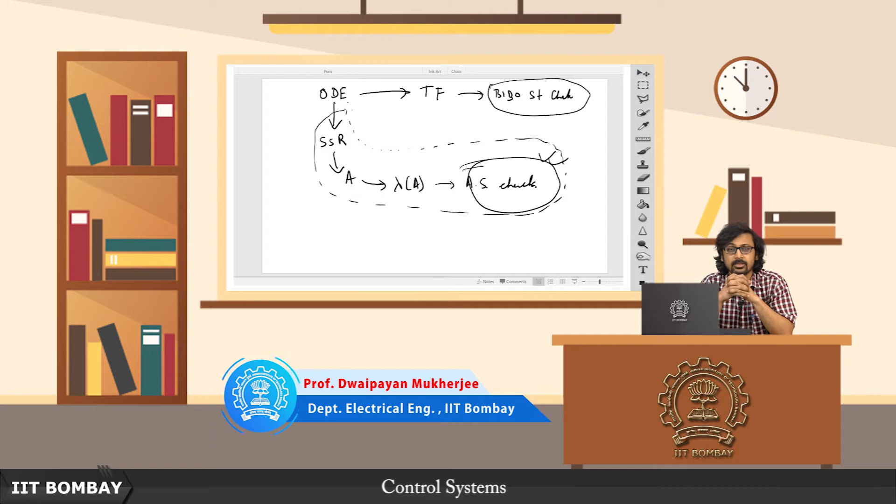Welcome back to another lecture on control systems. In the previous lecture, let me just quickly recap what we did. We actually saw this notion of asymptotic stability and compared it with the notion of BIBO stability, the erstwhile BIBO stability we had learnt during our foray into transfer functions.

When we are dealing with classical control based techniques, we were already aware of something called BIBO stable, bounded input bounded output stability. And we saw that this notion of asymptotic stability is a wider or broader concept that already incorporates within itself the notion of BIBO stability. So hereafter it makes sense to just talk about asymptotic stability, because that will automatically imply that it's BIBO stable, at least insofar as we are dealing with linear time invariant systems.

The asymptotic stability seems to be the most powerful notion of stability as a matter of fact. So with that in mind, we actually saw this figure that we drew in the last lecture, where given an ODE, given a system represented as a constant coefficient linear ordinary differential equation, you can go via this transfer function route and you'll only get as far as checking the BIBO stability.

So that's why it's the external description, the notion of external stability. On the other hand, if you start from this ODE and go via this state space realization route, go to this state space realization, pick out the A matrix, find out the eigenvalues of this A matrix and check whether they are all on the left half plane, and you assure yourself whether it's asymptotically stable or not.

And you find that if you can make it asymptotically stable, or if it is asymptotically stable, then it's guaranteed to be BIBO stable. So therefore this is an internal description of stability, internally stable.

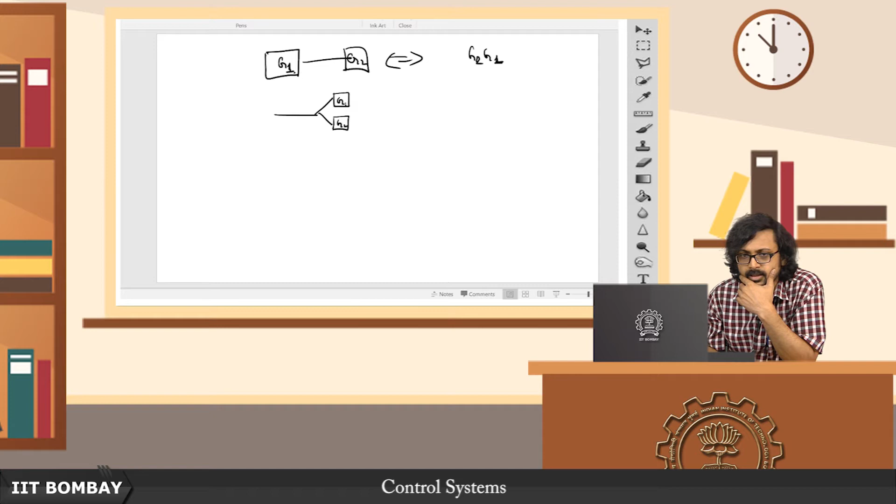We have seen earlier that when you are given this G1 and G2 in series, that's equivalent to G2, G1, if you are a stickler. Similarly, when you have G1 and G2 in a parallel path like this, then this is just the same as G1 plus G2. So then this is the same as having this block, G1 G2, as your input output.

Similarly, when we had this G1 sitting here and G2 sitting in the feedback like this, assuming negative feedback, then we saw that this is tantamount to saying G1 divided by 1 plus G1 G2, the whole thing.

So we have seen these block diagram reductions, but these are all in the transfer function domain. Now we have come a long way from the transfer function domain, and we are claiming that the state space method is a better way of representing systems for the simple reason that it gives us internal descriptions.

So now we wonder, like in the last lecture I discussed this point, that okay, maybe there are no pole zero cancellations within block G1 and within block G2, but when you combine them together, it might be that there are pole zero cancellations. So clearly you see there might be a flaw.

What is that flaw? If you are given a transfer function like this, G1 and G2, in this configuration or in this configuration or in whichever configuration you like, what you do is first reduce it, in the transfer function domain, to this. So we are still in the transfer function domain here.

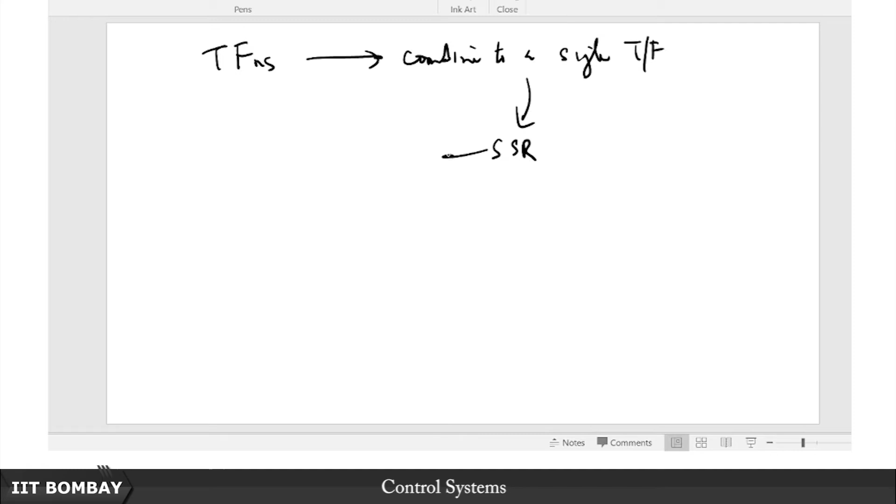So even though you might think, okay, I have these transfer functions, I combine them together, I got the overall transfer function, and then I go to the state space method. So here is the sequence of steps: given multiple transfer functions, I combine them to a single transfer function, then I go for this state space realization, and then I go for this lambda A check.

So what I have is multiple transfer functions, which I combine into a single transfer function. This I do in the classical domain, the Laplace transform domain. From this Laplace domain I get a state space realization, and then I check the lambdas. I look at the lambdas and find they are all on the left half plane.

So then I infer that the overall system is asymptotically stable. This combination of multiple transfer functions means there are multiple systems, interconnected systems. So you had interconnected systems, you got their transfer functions. Each system has an ODE, you get its transfer function, combine the transfer functions, all within the Laplace domain, and then move to the state space domain.

And then you do this lambda check. You will clearly see the flaw in this method. The flaw is that while combining these transfer functions into a single transfer function, it might be that each individual block does not have pole-zero cancellation, but there might be pole-zero cancellation between the different blocks.

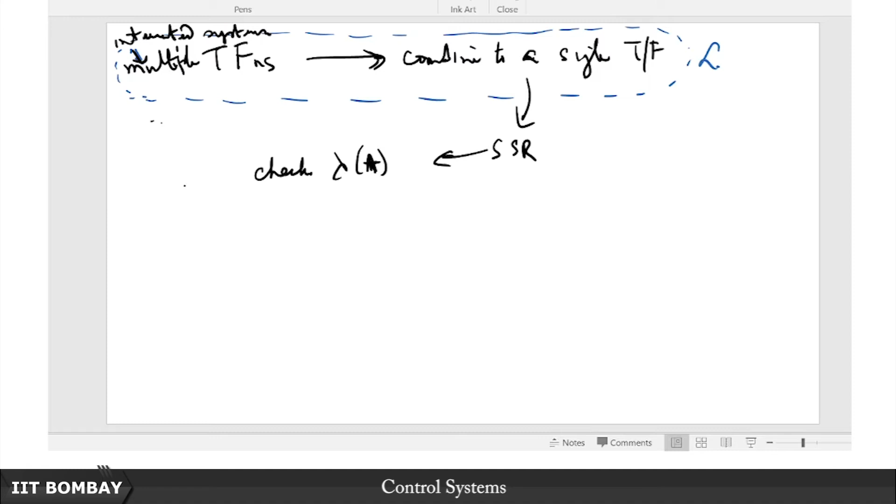So for instance, G1 and G2 might have a common pole and zero, G2 might have a pole where G1 has a zero. They might combine in a certain way such that all the poles of G1 and G2, if you sum them together, for example, take 1 by S plus A, plus 1 by S plus B.

Let me call this alpha, let me call this beta. So you get alpha S plus alpha B plus beta S plus beta A, upon S plus A into S plus B. This is the parallel realization I am talking about. Now suppose alpha plus beta is equal to 1, and alpha B plus beta A is equal to A.

Suppose this condition holds, then what will happen? This will lead to basically a transfer function that looks like 1 by S plus B. So the pole that was present in the first transfer function would have already vanished in this realization.

Similarly here also you can see that pole-zeros might vanish, there might be some cancellation between G1 and G2. Not all poles of G1 and not all poles of G2 will make their appearance in the overall transfer function. That is why this method is flawed. You might check the lambda A's and feel like, if they are all in the open left half plane, then this overall combination of systems is asymptotically stable.

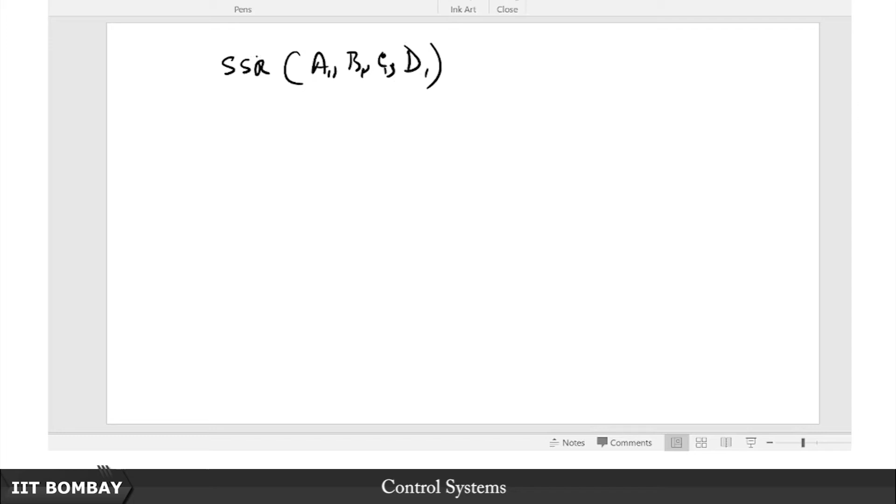Suppose I have A1, B1, C1, D1 for system 1, which is in cascade with state space realization of the second system A2, B2, C2, D2. We are trying to avoid getting from this state space to G1. You might think, let me go from this state space realization to G1, from this to G2, and then multiply them together. But that isn't going to work, that is a flawed method. We have seen that in multiplying we might actually cancel out some poles and zeros of each of those systems among themselves. So we now need to figure out a way of merging these together, and it turns out a little bit of algebra, very small algebraic manipulations, will allow us to do this.

It is not really very difficult to see how this happens. So let us take an example. I will basically solve it for 3 cases. Those are the 3 basic cases, and any other block diagram is going to be a combination of those 3 basic cases. So the 3 basic cases, example 1 is this, basically the same thing as I did earlier.

So you have this first system: x1 dot equals A1 x1 plus B1 u, and y1 equals C1 x1 plus D1 u. So this is my u. But what is the output here? The output here is y1, and this is the crucial bit.

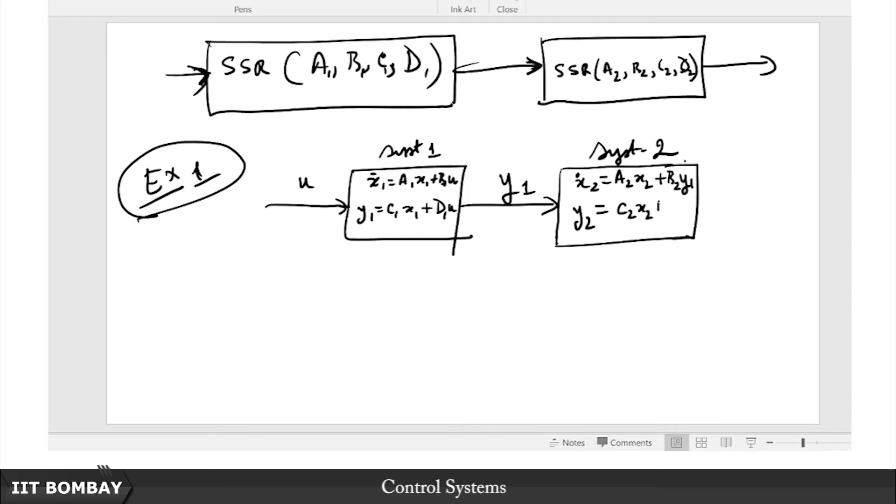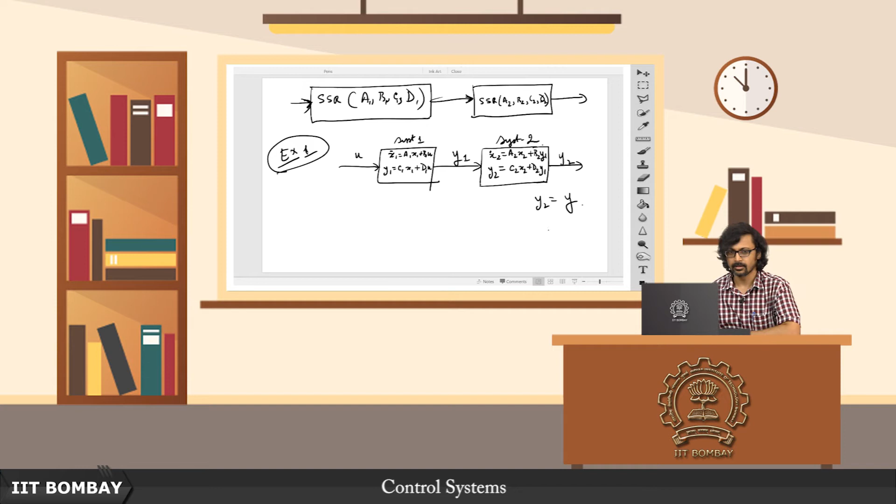Now when I am writing the equation of the second system, the states of the second system are - this is system 1 and this is system 2. So when I am writing x2 dot, I will write A2 x2 plus B2 times, now what is the input here? It is no longer U, it is going to be Y1. And Y2 is going to be C2 X2 plus D2 Y1, and I know from this interconnection Y2 equals Y. So basically I need to find the relation between this U and this Y, which is this U and this Y2, and I have to eliminate all the other intermediate terms like Y1, that is what I need to do.

Let me write that down a little more formally. I am going to be more interested in this second case. If I write x2 dot equals A2 x2 plus B2, and substitute this expression for y1 here: B2 times C1 x1 plus D1 u, which becomes A2 x2 plus B2 C1 x1 plus B2 D1 u. And y2, which is nothing but y, that is C2 x2 plus D2 times, again substituting y1 which is C1 x1 plus D1 u. Therefore I come up with C2 x2 plus D2 C1 x1 plus D2 D1 u.

So note, I am going to now focus on this y, and that is equal to this. This is my overall output equation, this blue part is my overall output equation, this y being equal to this. What is my state equation?

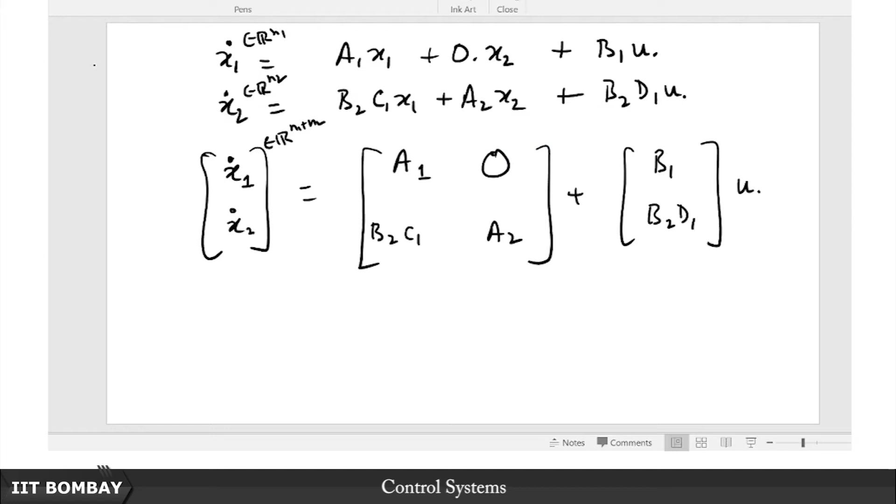Notice, so this is my overall C. My y matrix is now going to be, y is going to be C times x1, d2 c1 times x1, so it is d2 c1 times x1 and c2 times x2. Sorry about that, I have really made a bad error here. I should write x1 x2 plus this, plus what is this here? It is d2 d1 u.

d2 d1 u. So now my overall system matrix is this A, overall B matrix is this B, overall C matrix is this C, and overall D matrix is this D, just small algebraic manipulation here, and I have got the overall state space representation of two systems that are put in cascade. So if I know the state space realization of two individual systems in cascade, then I know the overall state space realization of the combined system.

This is the way to do it. Just like we had that multiplication may not be as simple as multiplication, but once you practice a bit of this and grow familiar with this form, you will be able to see immediately. It might even be worth committing this to memory. I am not suggesting you do that, but even if you do not, you can just derive this combination of these two in a minute or so.

So this is going to be your overall merged combined system, and now in order to check for asymptotic stability, all that you need to focus on is lambda A, that is it. And notice how very interesting, this is a block triangular matrix. So again a bit of linear algebra will tell you that the eigenvalues of this A matrix are nothing but the combination, or union, of the eigenvalues of A1 and those of A2.

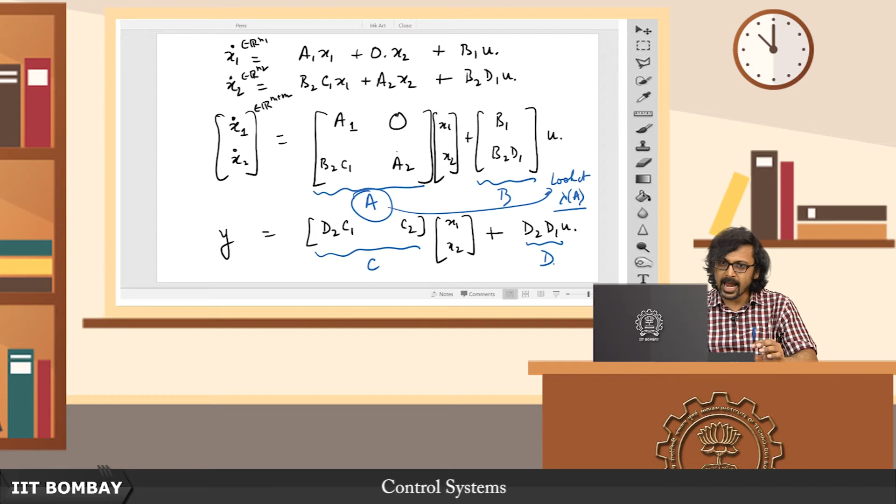Which is to say, if I now go back to this transfer function representation, it means that instead of merging these transfer functions together like I did here, if I had just taken the poles of this one alone and the poles of this one alone, and then looked at whether all of those poles are in the left half plane, I would have inferred the same thing about asymptotic stability. So if each of those individual systems is asymptotically stable, then the overall system is also going to be asymptotically stable. Of course, assuming that there is no pole zero cancellation within an individual system, it does not make sense to have a system where there is a pole zero cancellation within itself.

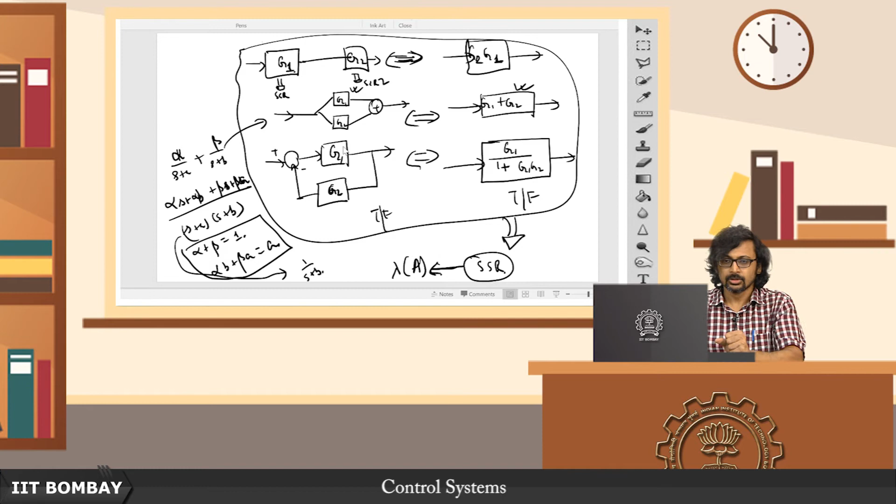After all, it is a hardwired system, as I said. So that is the notion of this combination.

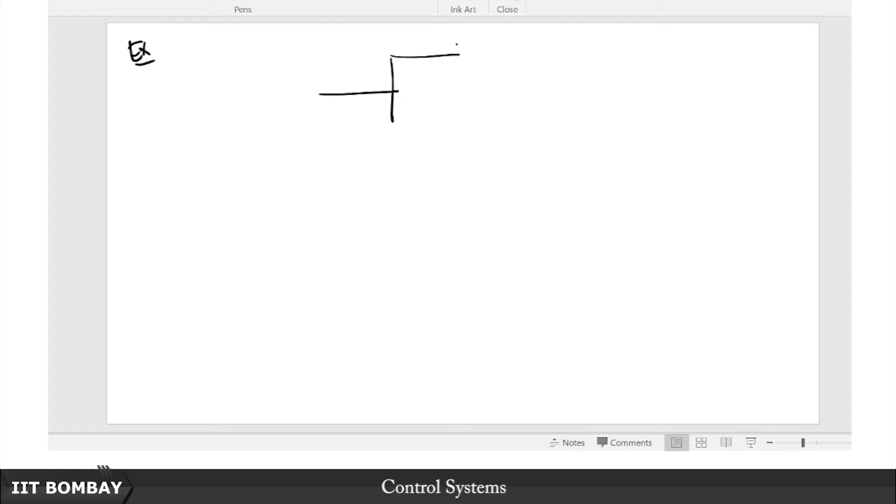Just to give you another idea about how this merger happens, I will take the parallel case as well. So this is basically x1 dot is equal to a1 x1 plus b1 u, y1 is equal to c1 x1 plus d1 u. So this is my u, this is my y1, and similarly if I now come to this case here, I will have x2 dot is equal to a2 x2 plus b2 u.

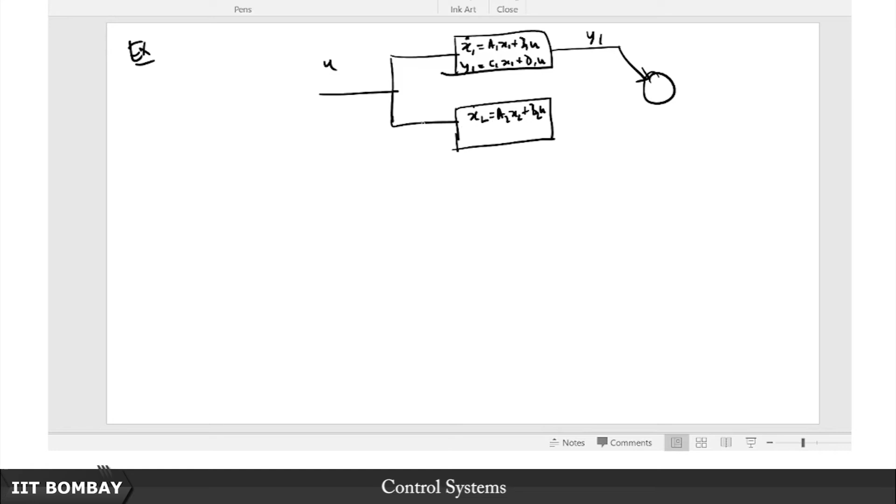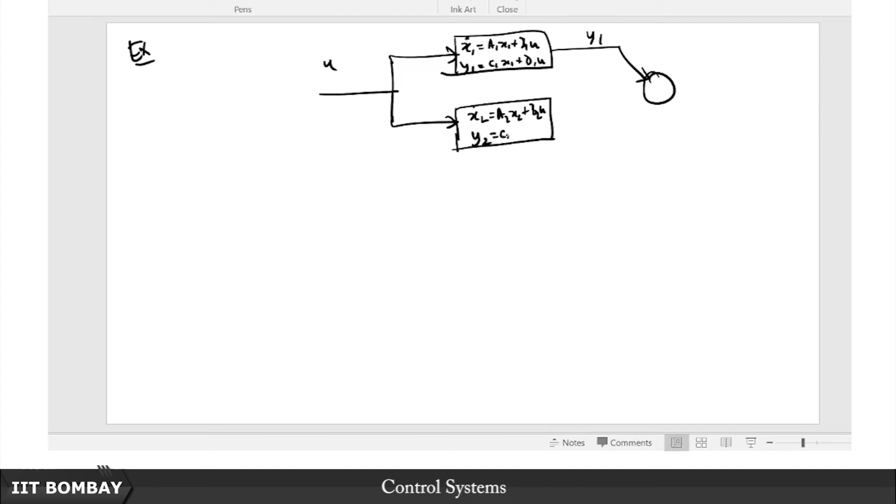Note that both of them have the same input here now, unlike in the earlier case where the output of the first system became the input of the second. Here both of them have the same input u, and this y2 is going to be equal to c2 x2 plus d2 u, and then they get added. So this becomes your overall y.

So how am I going to write this? This is actually pretty straightforward here. The only thing that happens is the y gets changed, everything else remains the same.

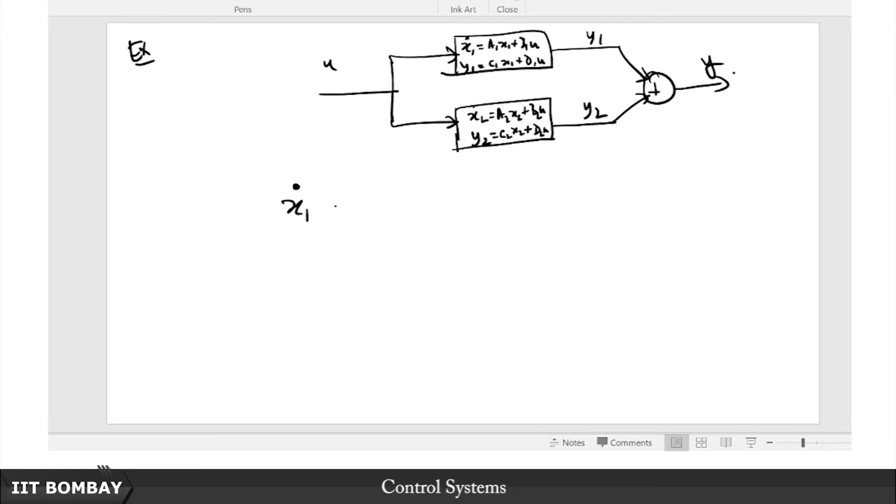So I can just write this as x1 dot is equal to a1 x1 plus 0 times x2, plus b1 u, and x2 dot is equal to 0 times x1 plus a2 times x2 plus b2 times u. And what about y is equal to y1 plus y2? That is going to be nothing but c1 x1 plus c2 x2 plus d1 plus d2 times u.

So if I now write this in the compact form, notice as before I am going to concatenate these vectors together and write this in the compact form. Look, this time it is going to be even simpler, it is going to be a block diagonal form. So you have this x1 x2 sitting here.

Plus, yeah, so notice here, what did we have? Here we had a block triangular form. In that case, what was the situation going to be like? We said that we want to infer about the eigenvalues, so you better infer about the eigenvalues of this overall matrix. Here also by the same token, this is the A matrix we will be interested in for our eigenvalues, and here it is very transparent, it is just those of A1 and those of A2, that is all the eigenvalues of this overall A matrix can be like, and this is going to be B1, B2,

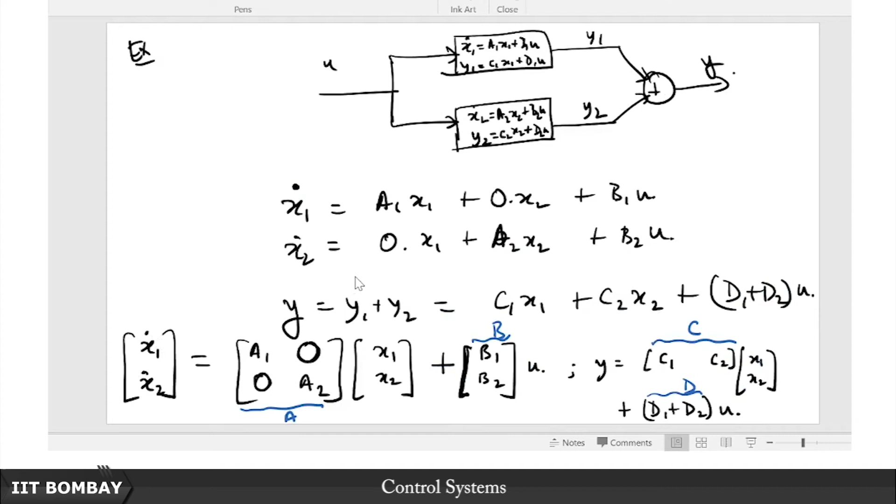So we have seen at least two kinds of the cascade combination of two state space realizations, and we have seen what the equivalent state space representation is. Now we have combined the parallel combination of two state space realizations, and we have seen how this is.

Next, what we are going to look at does not always stand up to scrutiny, because remember, a state space realization can only be obtained for systems which have, the crucial important thing is, a transfer function that is at best biproper. Either it is going to be strictly proper or biproper. If it is not, if it is improper, of course there are some polynomial matrix descriptions, but that's a very sophisticated concept, so I am not going to go into that.

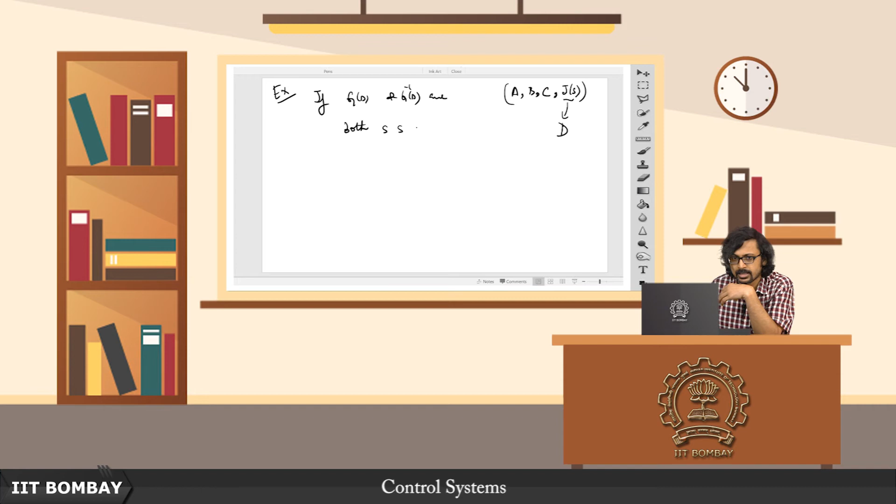So then it means that if GS and G inverse S are both state space realizable, what can we say? If GS is state space realizable, then the degree of the denominator of GS better be greater than or equal to the degree of the numerator of GS. But if G inverse S is also state space realizable, then the degree of the numerator better be greater than or equal to the degree of the denominator of GS. So combining these two together, the only situation when we can have both G and G inverse state space realizable is

when D is not equal to 0. We are talking about SISO, of course. For multi input multi output, D has to be non-singular. But the SISO case equivalent is that D is not equal to 0, because if D is 0, then GS is strictly proper. If GS is strictly proper, then G inverse is going to be strictly improper, so G inverse cannot be realized by state space.

So therefore, the third exercise is, for a given SSR, say A, B, C, D, we want to obtain the representation of the inverse system. If we want to obtain the representation of the inverse system, it better exist first. If it has to exist, then the assumption is that D is not equal to 0, because otherwise this question makes no sense. So why is this important?

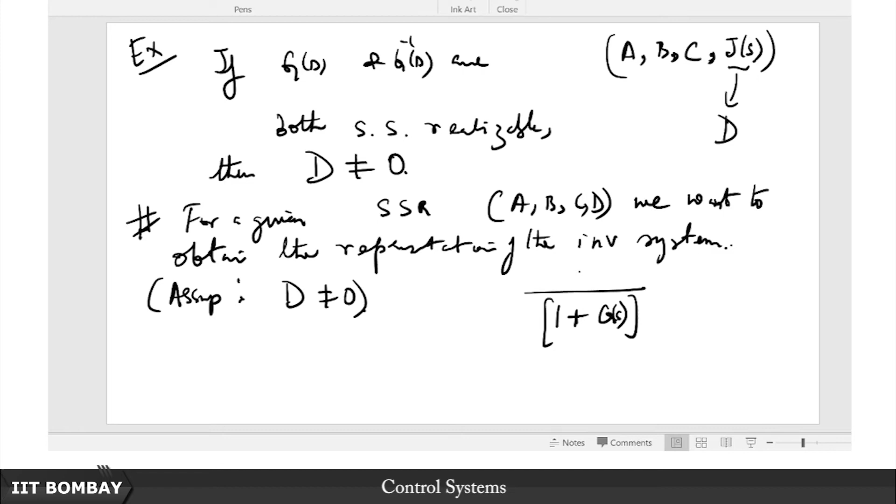So therefore we often have this sort of thing where G by 1 plus G we want to realize. So that is like saying that we have a G block here and sort of a 1 by 1 plus G block here. So suppose we have a state space realization for 1 plus G, of course. So can we get a state space realization for 1 by 1 plus G?

So 1 plus G is state space realizable. So can we get a state space realization of 1 by 1 plus G? That is the question. If we can, then we can apply the cascade rule and get the state space realization of this, and merge them in cascade like we did here. So it's a combination of two steps: first, get the state space realization of the inverse, then get the state space realization of the cascade.

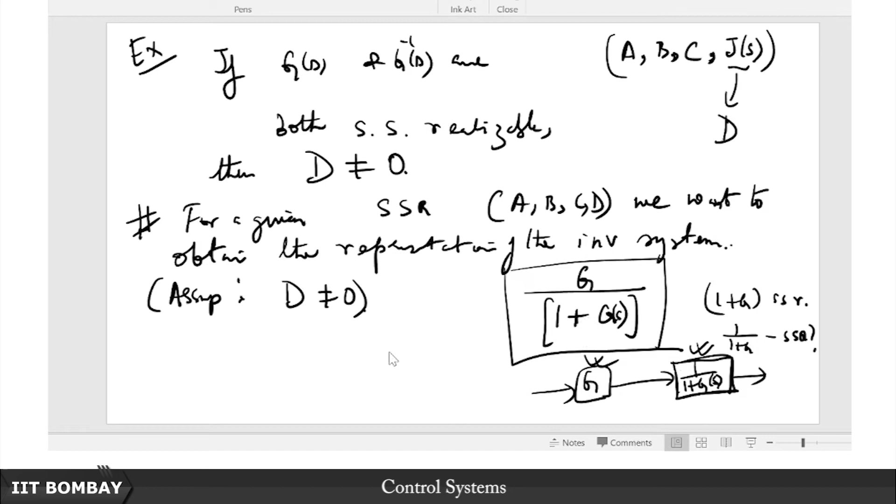So for that purpose this may be necessary, but now we have seen that for the inverse to exist, this D needs necessarily to be non-zero, as will be the case for this. If you try to realize this state space system, the D will always be non-zero because it is going to be biproper. So it makes sense then. So that is a standing assumption that we are not making just for the sake of it, but because for the inverse to exist, D must be non-singular, in our case non-zero.

So enough said, let us see how this representation is. So the original system is x dot is equal to Ax plus Bu, y is equal to Cx plus Du. So this is the original system, in which the input is applied from this side and the output is taken out from this side.

Now you might ask, what is the depiction of this inverse system in this block diagram, when do we say that this is indeed an inverse? It turns out that the notion of this inverse is, if instead at the output terminal you had given an input — what we are saying is that if at the input terminal you applied this output, at the output terminal you would get back this input. So it is like the inverse mapping, that is what the inverse system is.

So this is going to be then some x dot is equal to A x plus B u — sorry, actually you do not need to name this x tilde because after all the states of the system are still going to be the same. So here now this input is going to be y and the output signal is now u. So we do not need the B tilde, we will name it later, sorry about that confusion. So you just have to see that at the input now you have the y signal, so it is just Ax plus By, and at the output you have u, so that is going to be Cx plus Dy. So this is how our system's description is.

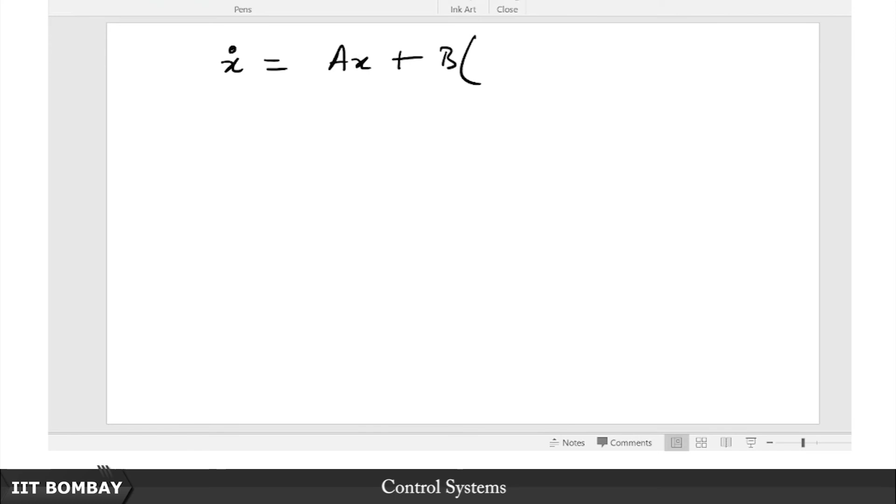Now if I plug in this expression for y here, what will I get? X dot is going to be equal to, as before, Ax plus B times, and now I substitute for y, so that is D inverse u minus D inverse Cx. So that is going to be A minus B D inverse C times x, plus B D inverse u.

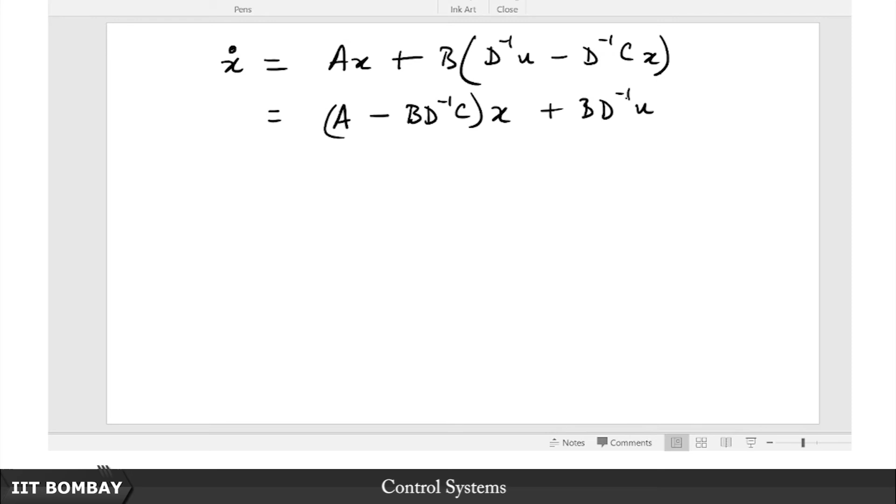And y, we have already gotten its expression in terms of u: minus D inverse Cx plus D inverse u. So if you want to write this in state space form, this is going to be my A matrix, this is my B matrix, this with the minus sign is my A bar, B bar, this is going to be my C bar matrix, and this D inverse is going to be my D bar matrix. That is all there is to it.

So basically we have seen that there are three different types of combinations of state space realizations. First you put them in cascade, we have seen how to get the overall state space realization in cascade, then in series, in parallel, and we have seen how to get that. Now we are saying that if you take the inverse of that transfer function, here is what you get. Then you better look at this particular A matrix.

So now if you want to check for the asymptotic stability of the inverse, the eigenvalues of this A bar, or the eigenvalues of A minus B D inverse C, these better be on the open left half plane. If these are not all on the open left half plane, then the inverse will exist, but the inverse will not be asymptotically stable.

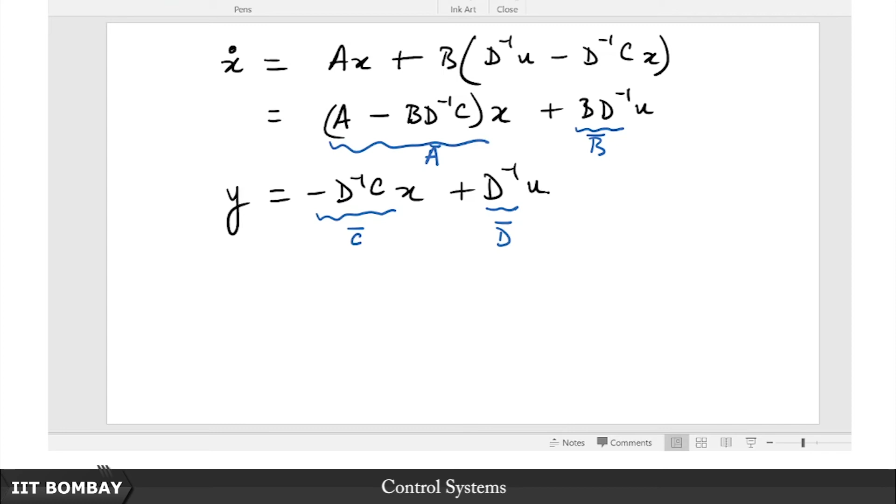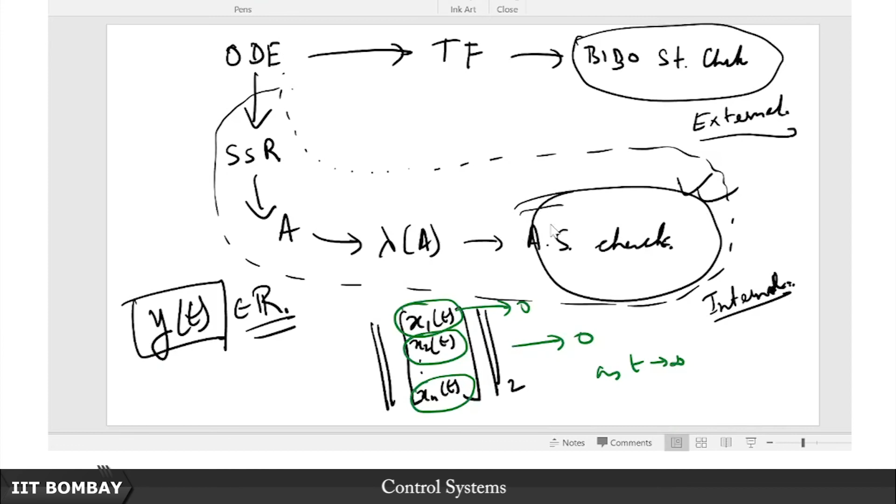So these are the reasons why we went into this. Let me quickly recapitulate why we went into this state space combination of systems, because we saw that there was something severely flawed with this method of checking for stability. That is, if we go via the BIBO stability route, which is to merge the transfer functions together in the Laplace domain itself and then get it to its state space realization and check for the eigenvalues, we might have already cancelled out some poles and zeros inadvertently while merging the transfer functions together.

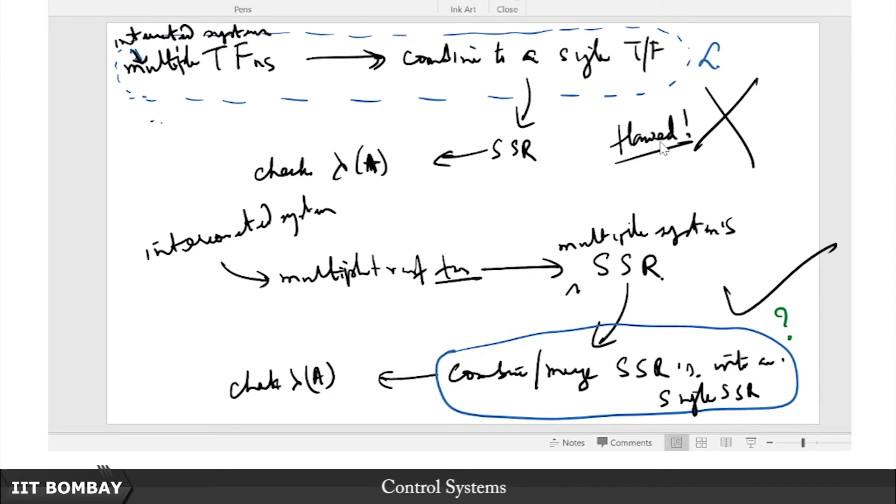Therefore, a better idea is: you have different systems, take their state space realizations before merging them together, and then merge them as different mergers of state space realizations rather than a merger of different transfer functions. That way you will be able to preserve the structure of the A matrix, and thereafter if you just look for the eigenvalues of the overall A matrix, that will tell you about the asymptotic stability. So that is basically the crux of this discussion.

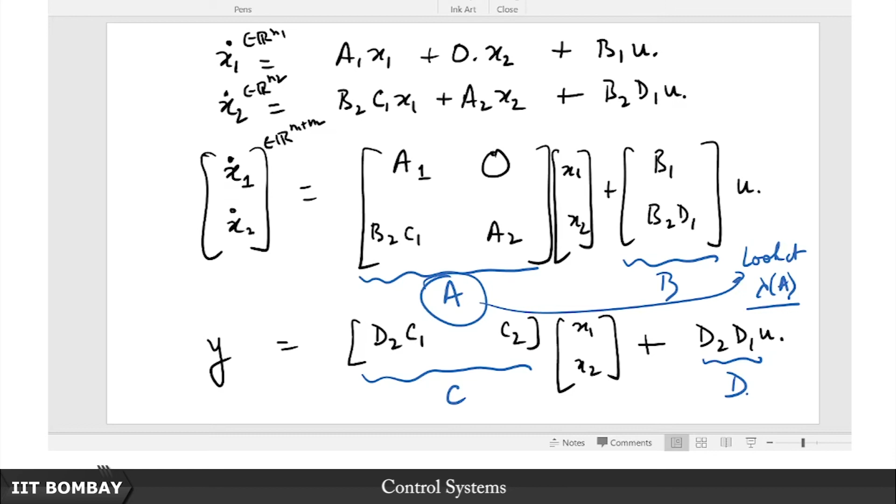I hope that with that we have nicely wrapped up whatever we wanted to discuss. Of course, there is no limit to the depth to which one can go in pursuit of these ideas of stability, but we will have to put an end to it here. If you want to go further, there are courses such as those on robust control, which talk about these state space realizations and also how to design controllers. In our course we will also see a very rudimentary controller design technique, a state space pole placement or state feedback kind of controller design, but that will probably be one of the last topics we discuss.

We will see the design of a controller and the design of an observer, and that will wrap up our course. But of course, these state space realizations that we have just shown you how to merge them together in the state space domain, these are very useful and particularly useful after a point when you design controllers.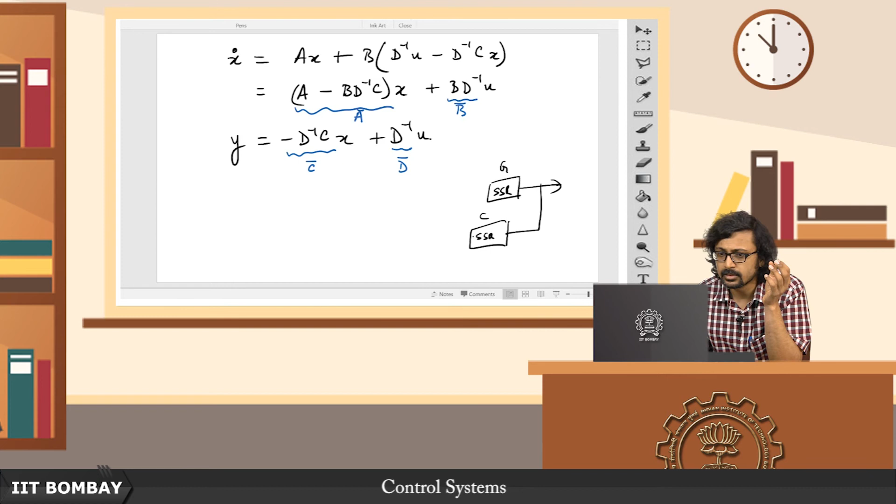So you basically have something like a plant whose state space realization is given, and you are allowed to design a controller. So this is the plant, this is the controller. The state space realization of the controller is also given, and instead of designing the poles and zeros of the transfer function like we did using root locus or Nyquist or whatever design technique, now you want to directly say what the state space realization of the controller is that meets your performance metrics or goals.

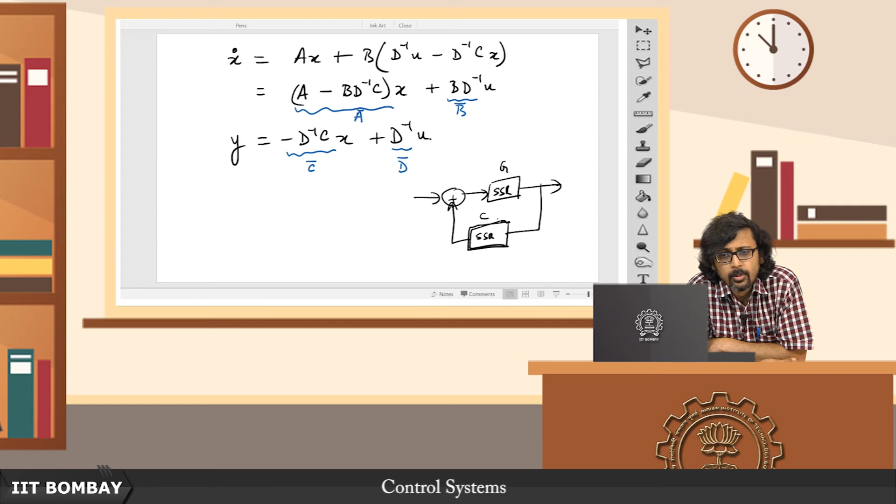So we design controllers directly in the state space domain. That is regularly and routinely done in courses or topics such as robust control. So it is very important in such courses or domains to be very familiar with, just like you are now familiar with how to merge transfer functions together, whether in cascade or in parallel or in a feedback configuration.

So also should you try and familiarize yourself with how these different state space realizations, when put in cascade, when put in parallel, when put in feedback configurations, how they can be merged together and written in a compact matrix form. So hopefully this brief discussion will be a stepping stone in that direction.

You might practice a few problems and see that this agrees with whatever we know about overall transfer functions to state space realizations, going from transfer function to state space and state space to transfer function. Take some examples of transfer functions, merge them in the transfer function domain and then realize it in the state space domain, and then do the reverse: take the transfer functions, go to their state space realizations and merge them in the state space domain. You will see that you end up with the same thing, provided there are no pole zero cancellations between these individual blocks.

So having seen the state space realizations for those three types of interconnections, that is the cascade, the parallel, and the inverse of a system, I leave this as an exercise to you to write down the state space realization for an interconnection in a feedback loop, whether positive or negative. Get the state space realization for G and for C, find the overall state space realization of the system, and derive the condition for stability. You will see that the A matrix will be rather more complicated than the cases we have handled so far.

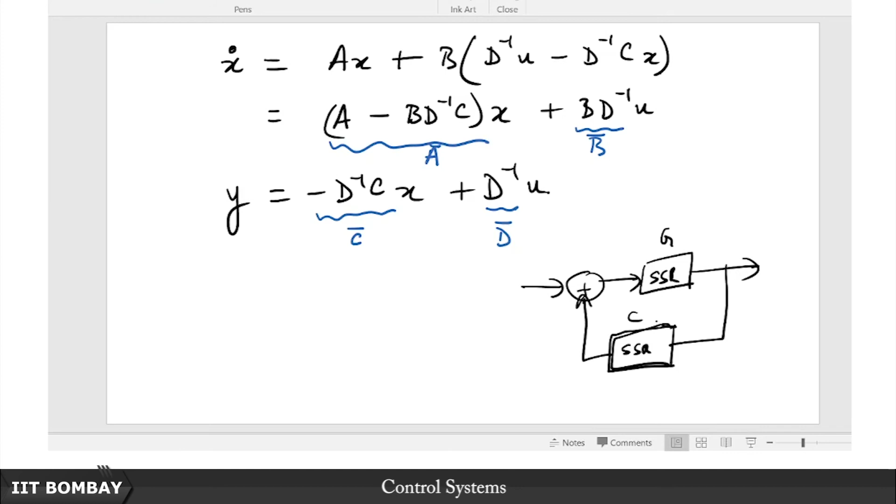So the next topic that we are going to see, I am just going to briefly introduce in this lecture, and we are going to see much more details of this. The next topic is these notions that have been pretty mystifying up until this point because I have just loosely mentioned them in passing: observability and controllability. I shall just provide you with some motivation for studying these problems in this lecture today. There will be some early motivation, and then we shall get into the rigorous technical nitty-gritties and details in the upcoming lectures.

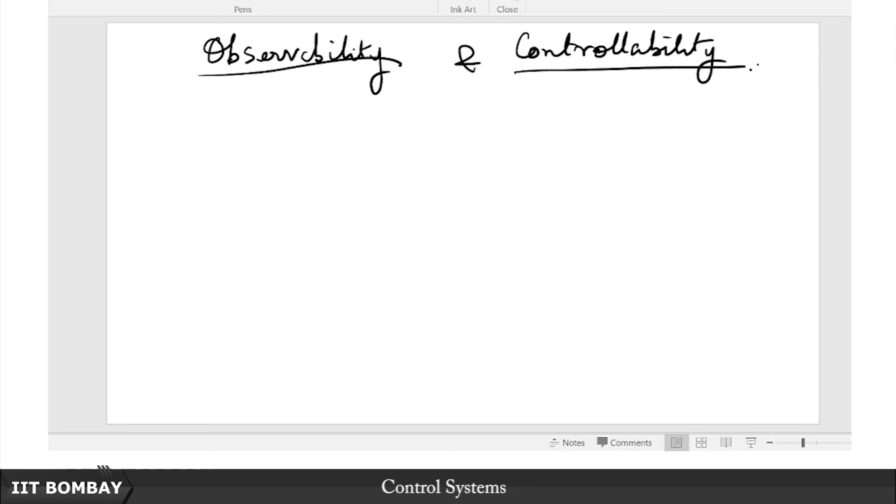So what is this notion of observability? At the very rudimentary form, let me take you back to how we started our discussions on state space systems. So what did we do initially? We put this bank of integrators, if you recall. We had this bank of integrators for a state space realization. Even before that we had this third order differential equation, third degree differential equation.

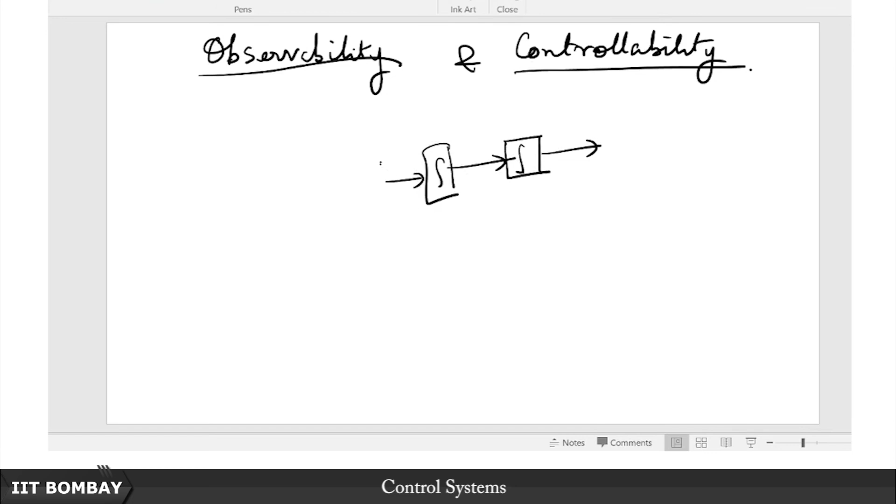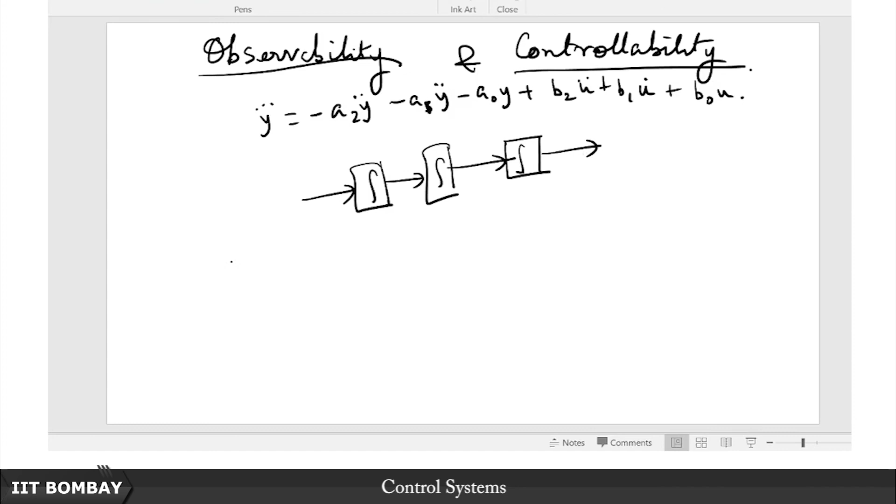I don't remember in which order I put the coefficients, I don't recall exactly. So this was what it was, something like: minus a2, y double dot, minus a0 y, plus b2 u double dot, plus b1 u dot, plus b0 u. This was how we wrote it, and then we integrated this thrice. This is just a reprisal of what we've already done. So this is going to be like y equals minus a2 times integration of y, minus a1 times... sorry, this was I unnecessarily put two dots here, excuse me, this will just be one dot.

So this is twice the integration of this, minus a0 times thrice the integration of y, and then we had this plus b2 times the integration of u, plus b1 times twice the integration of u, plus b0 times u. And this we realized, we saw that with this we put these summers here, excuse the bad drawing, but I have already explained what this means earlier. So this we called y, then this one we passed through

once only, so this was minus a2 times y integrated once, then minus a1, this is minus a1 times integrated twice, very bad drawing I am afraid, and then we had a summer here too, so this was minus a0 times, I am being casual about this because we have already seen this picture, right.

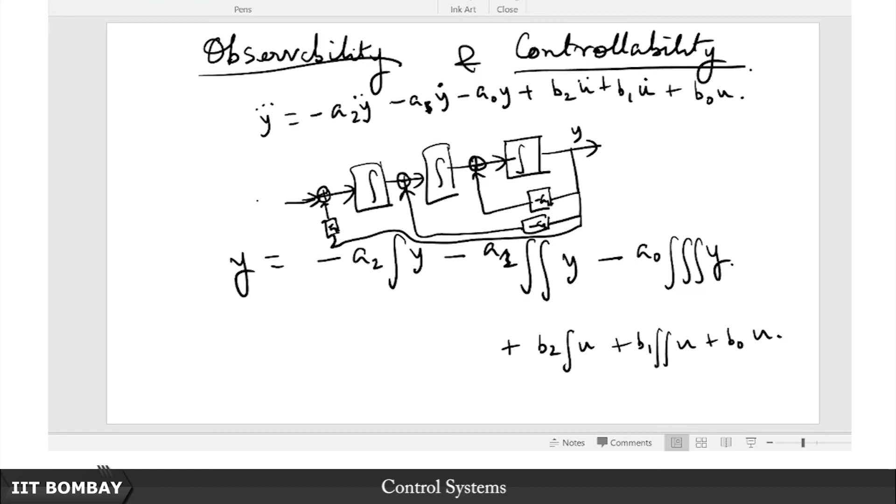And what else did we have? We also had to integrate this u here. So one time we had this b0, this u passing here, and then we had to take this and integrate it twice, so we put in this had to be integrated twice, so we put in this, b1. So this was b1, we put it like this, and then we had this other time that it had to go through once, that was b2. So this is how we realize this.

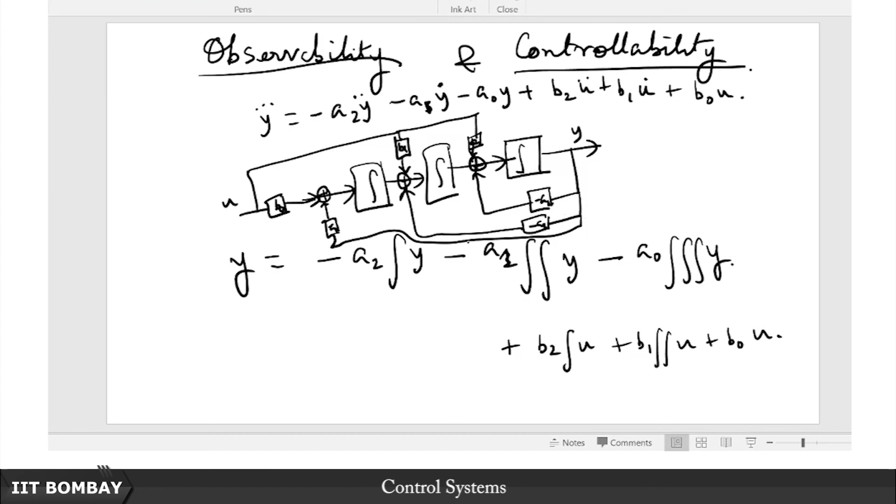Remember, a very bad drawing, I apologize, but I am doing this loosely because we have already drawn this elaborately many classes back. It turns out that this particular form of realization has a name which I withheld up until now, or maybe I mentioned in passing, I don't recall.

So this is called the observer canonical form. And now when we understand this notion of observability, this will be actually a little clearer to us.

So when we realize things using these op amps which act as integrators, think of the problem in this fashion. We have been given this analog computer. So this entire thing here is within a black box.

We have no access to this, suppose. In practice you would see that all these integrators are accessible and you can actually feed in voltages to these integrators. But suppose this is a complete black box, like the analog computer comes in a boxed package. You just have a wire that goes in and a wire that comes out, an input port and an output port, and whatever is inside you know it is this, but you are still not very sure that you can use this in a handy way.

Why is that? Because you want to use this analog computer to simulate or solve for this differential equation given certain initial conditions. Now suppose I give you a particular initial condition. How many initial conditions do you need? Suppose I give you some y0, y dot 0, and y double dot 0. Suppose I give this to you, say some typical value 1, 3, 5, 1, 3 minus 5, whatever it is.

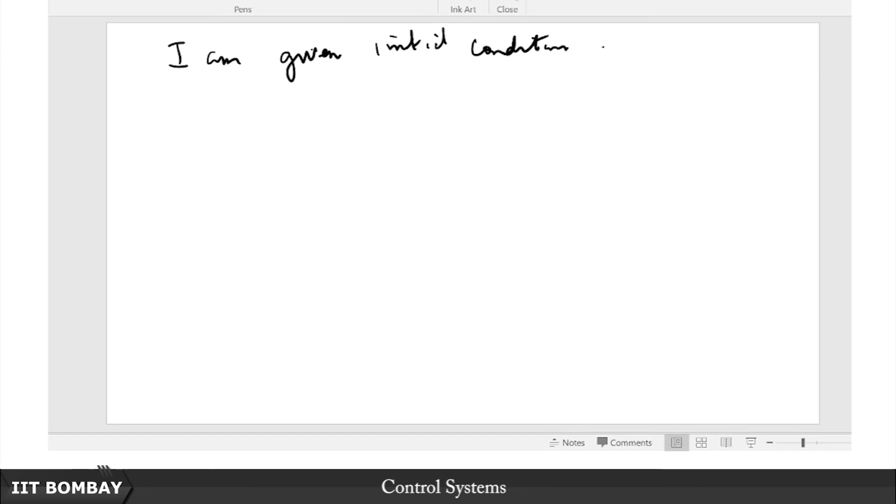So remember, the problem is as follows: I am given initial conditions in terms of y(0), y dot(0), and so on, up to some n minus 1th derivative of y. Yeah, for an nth order differential equation you need the initial condition of y and its derivatives up to the n minus 1th derivative. That is the typical initial value problem, right? You need n initial conditions to solve it.

So I have been given this. I am given initial conditions in terms of y. Can I determine—so this initial condition is at 0 minus, maybe 0 minus, 0 minus—can I determine what x1(0 minus), x2(0 minus), and so on till xn(0 minus) should be for these initial conditions?

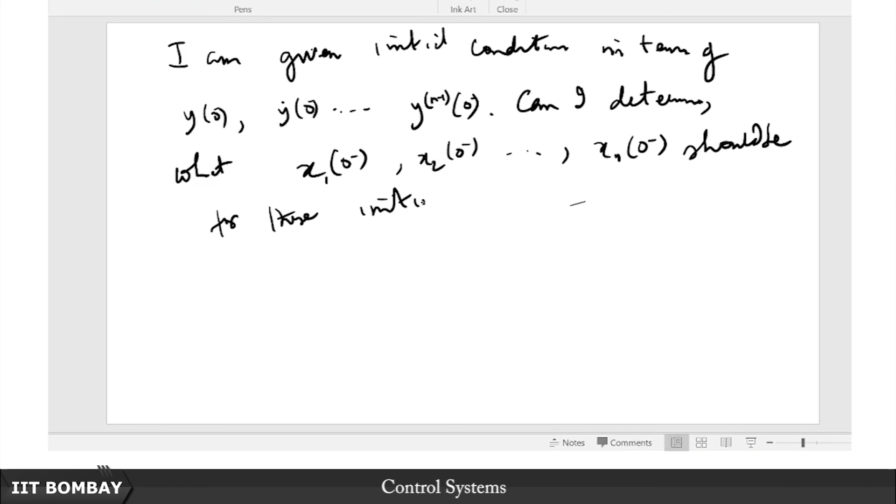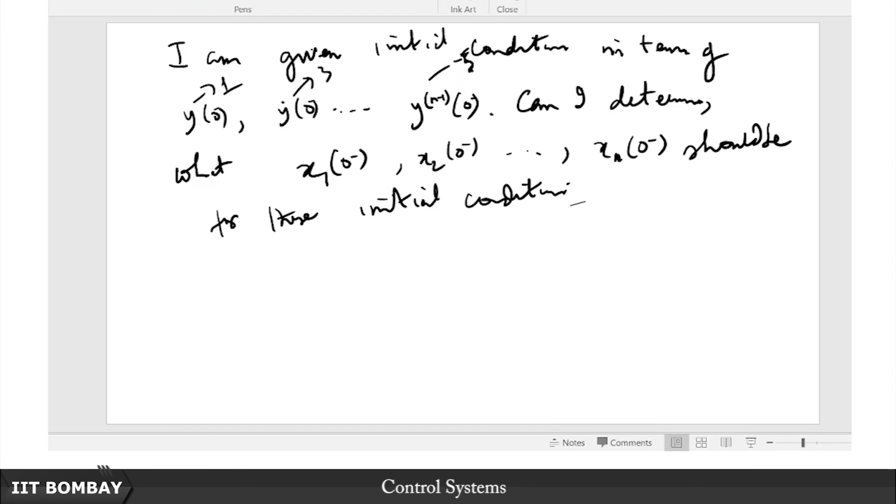Yeah, so remember, I have numerical values for this. This may be 1, this may be 3, this may be minus 5, as I chose in the previous slide. But I still do not know what x1's initial condition, x2's initial condition, and xn's initial condition is. It turns out that for certain forms of realization such as this, it may be easy to obtain. But what about some other form of realization? As we have seen, there are different state space realizations, right?

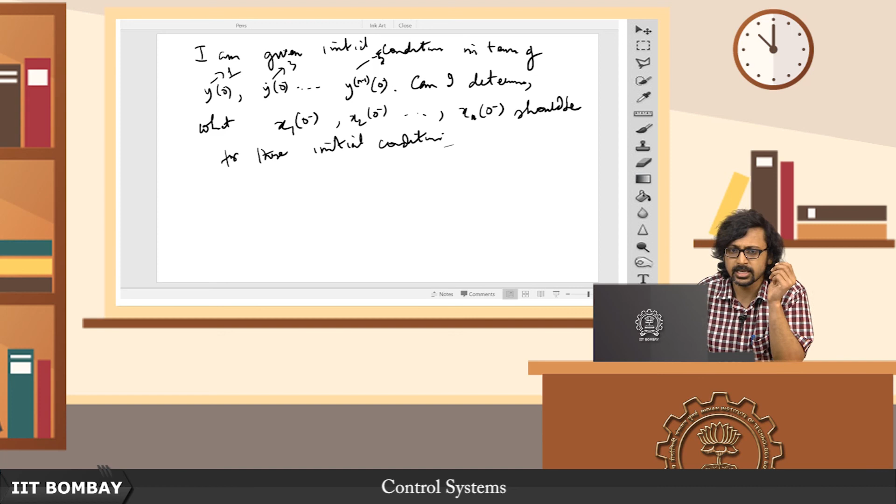So the question is: given any state space realization, I do not know how that analog computer is connected inside, I do not know about the wiring—I just know that it solves this particular differential equation. That is how someone has connected it and given it to me. And now I am told that this is the initial condition in terms of y, and I better feed in such an initial condition so that these y's are set up for this solution.

So remember, these days when you solve a differential equation using MATLAB, with Runge-Kutta or any other method, what you generally do is feed in some initial condition to the ODE, and then propagate that initial condition through the dynamics of the system. So here also you have to propagate this initial condition, but for that you need to know what the initial condition at each of those integrators is going to be. This is the problem of observability.

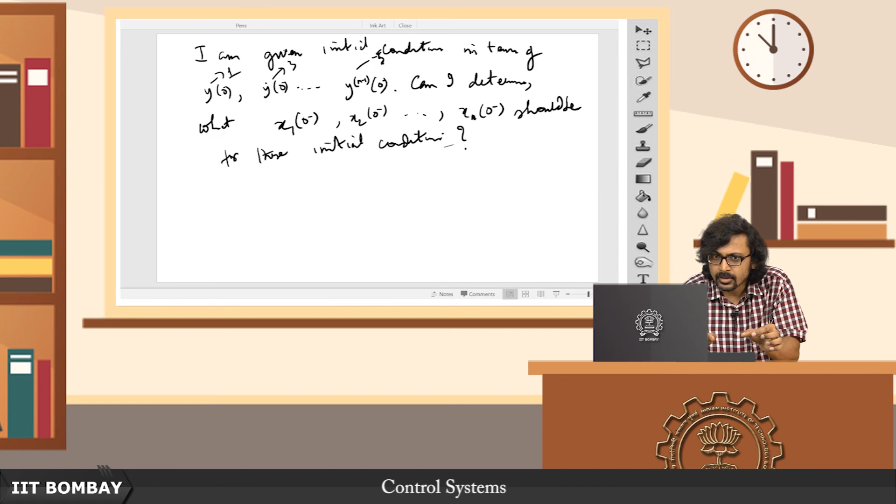Given the initial condition in terms of the output, can I translate it to the initial condition in terms of the states? Because if I can, then I have some hope that I can feed in those initial conditions to my integrators, since the output of each integrator is a state in this rudimentary definition. So if we can do that, then we can set it up.

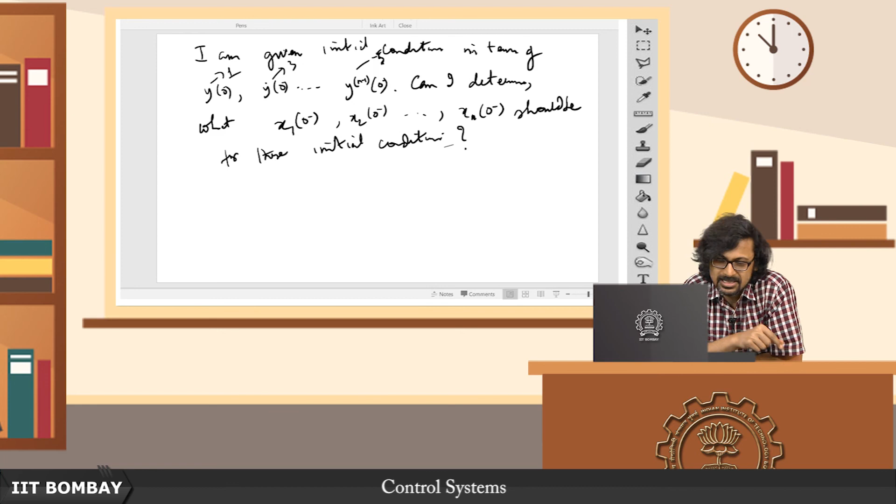The second question: can we set it up? What do I mean by that? Remember, we are assuming that this is all inside a briefcase, maybe this analog computer, or inside a big box. So the only access I have to it, at the input channel, is through this U.

So now my question is, okay, you've given me y0 equal to 1, y dot 0 equal to 3, and y double dot 0 equal to minus 5. And for that, let's say I have found that I need, for my particular realization, x1 0 and x2 0.

Based on the wiring diagram drawn on top of the briefcase, I have done some computations, never mind how, and figured that this should be 2, 4 and minus 7. So this matches: if I set my initial conditions of the integrators to 2, 4 and minus 7, then the initial conditions at the output, y, y dot, and y double dot, turn out to be 1, 3 and minus 5.

Now the point is, if this is what I have to set at the initial condition of each integrator, how can I set it? The only way is by giving some input voltage to this U. But is it guaranteed that I can always cook up some U which will give me exactly the initial conditions needed to set each of these integrators to 2, 4 and minus 7? That is the problem of controllability.

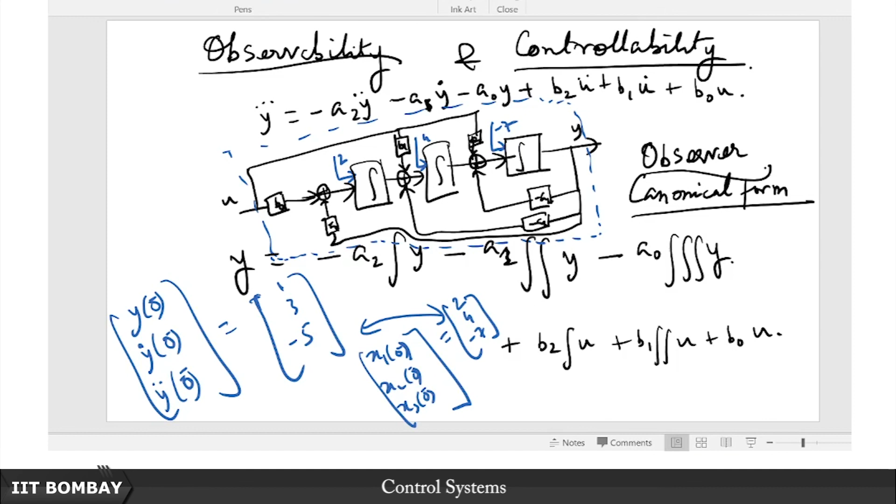You might think, well, you can just open the box. This is after all an analog computer, so this problem isn't very meaningful for it, and you might ask why study controllability and observability. But think of a system that is very remote and you don't have access to, not a simulation block. Think of a system where you don't have access to all these different states, nor can you read off all these states from the output. What do you do then?

That is the problem. So systems are said to lack observability or controllability, and it's a serious issue. That's why we need to understand when a system is observable and when a system is controllable. We'll get more into the mathematical details in the next lecture, but hopefully in this lecture you've at least been introduced to these ideas of what observability and controllability entail.